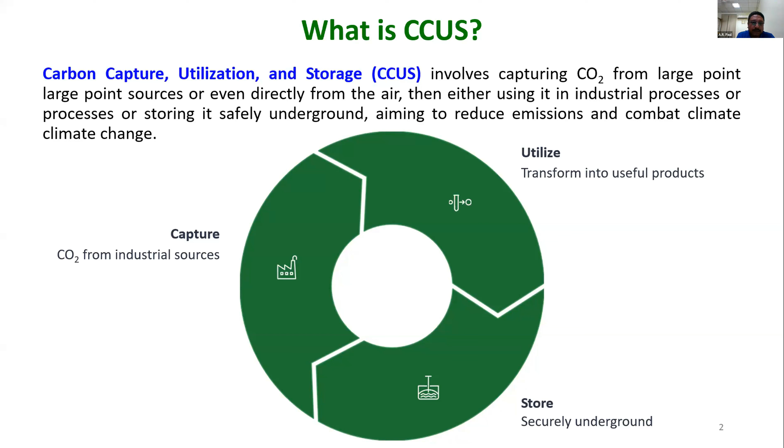In the second half of the lecture, I will focus more on the storage part, mostly the sequestration part. In the first part of my lecture, I will focus on capture and utilization, both.

If you see the key sectors playing a role in carbon dioxide emissions in India, this is a 2030 projection. Our power or electricity generation sector takes a lion's share, followed by industry. In this industry, there are a few hard to abate sectors like steel, cement, and fertilizer. These are called hard to abate because it's very difficult to remove carbon dioxide from their process. Suitable technologies are still under development for this sector. Next is transportation, which emits a lot of carbon dioxide locally, especially in the metros. Then residential - with rapid urbanization in many tier 3 and tier 4 cities and towns in India, even villages are not villages anymore. Almost all houses are built up in concrete, so huge concretization is there, and it also plays a role in emitting carbon dioxide. And agriculture. So these are the five major sectors playing a role in emitting carbon dioxide in India.

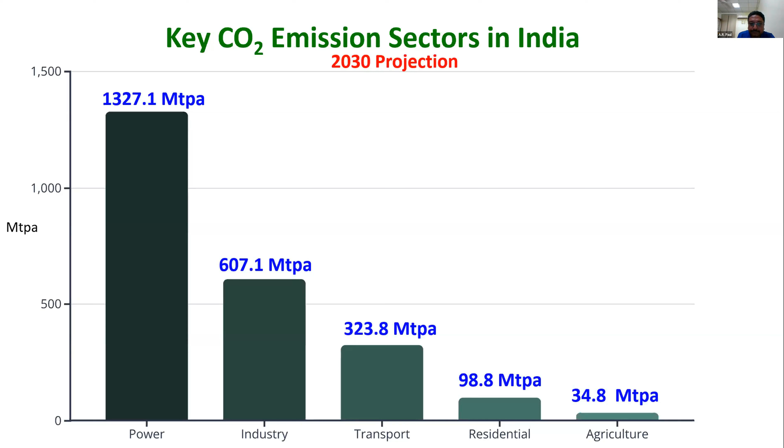Now I'm talking about carbon neutral versus carbon negative technology. I'll get a chance to discuss this later, but a few things are important. If a straight question is asked whether CCUS is carbon neutral or carbon negative or both, I must say it depends on the situation - case to case basis, depending on which technology you use for CCUS. For example, if you use a closed loop carbon technology where CO2 is captured, then utilized to make some product, and then carbon dioxide is recycled, then you may call it carbon neutral. And it can be carbon negative if you combine this CCUS with some negative emission technologies - right now, direct air capture or bioenergy with carbon capture and storage. So it depends on which technology you use, but direct air capture is still a nascent technology and the cost is prohibitively costly, so you cannot really induct it for the industry.

Now we'll explore some innovative solutions to reduce carbon dioxide emissions and foster a greener future. If you see the carbon dioxide emissions in India, a few sectors I mentioned are branded as hard to abate, like cement, steel production units, chemicals, shipping, and aviation. These sectors are really very difficult and challenging to decarbonize because of their heavy dependence on fossil fuel. Nowadays steel companies are trying with hydrogen - they are using hydrogen in the steel process to decarbonize it. Sweden is the first country to decarbonize steel production with hydrogen. Indian steel making companies are still doing research with help of funding, in-house funding, as well as funding from a few countries like Australia.

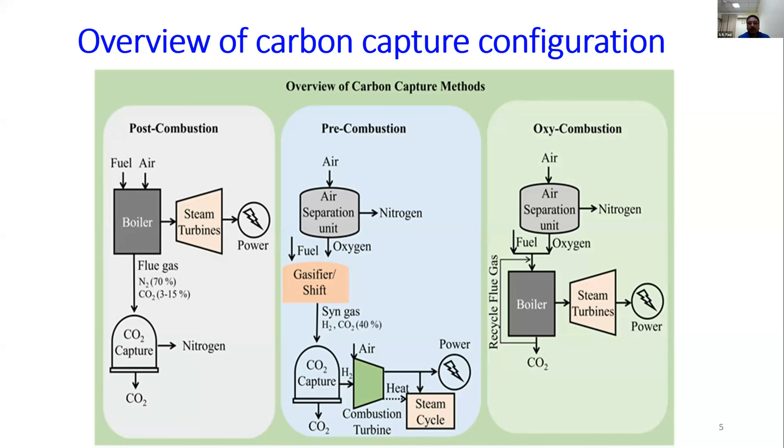So in oxy-fuel combustion, what happens? You burn fuel with pure oxygen to create a carbon dioxide rich gas, and that is easier to capture. So these are the three carbon capture methods.

Apart from that, there is another method known as carbon negative methods, direct air capture, where you can remove carbon dioxide from the ambient air, thereby addressing both ongoing and historical emissions. But there is a challenge - this direct air capture technology is still in its early stage. The cost estimate to extract per ton of carbon dioxide is around US $400 to $800, and its operational scalability is yet unestablished.

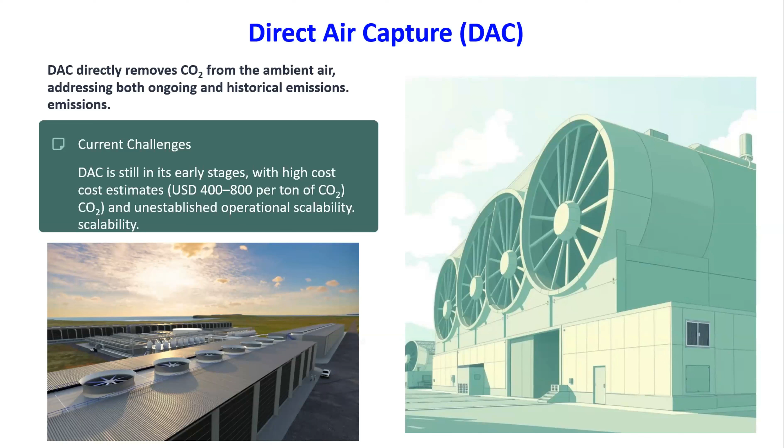DAC is useful if you capture from large point sources. For limited sources, DAC will not be cost effective at all. Now we'll see different CO2 separation technologies.

One is chemical and physical absorption. In chemical and physical absorption, different chemicals are used. Chemical absorption is used when you will get low carbon dioxide pressure. If your carbon dioxide pressure availability is high, you go for physical absorption. But the advantage with chemical absorption is that it handles CO2 effectively.

Therefore, there is no question of CO2 removal - the removal is effective. Another thing is physical absorption process is energy efficient. So there are both pros and cons with chemical absorption. Depending upon the scenario, you can choose.

Next is cryogenic capture technology. So in cryogenic, what happens? You cool and compress the gas to force it into a phase change, and in this way you can achieve very high carbon dioxide recovery.

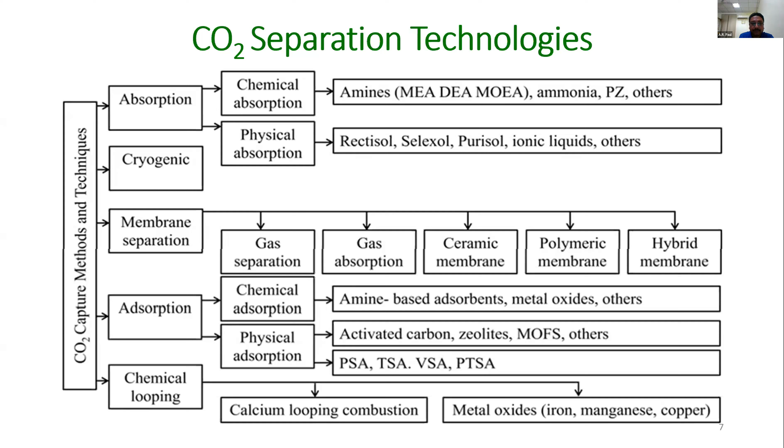Last but not least, is chemical calcium looping. It enables inherent CO2 separation using either metal oxides or calcium looping technology. It is cost effective, and calcium looping may increase plant efficiency. So these are several CO2 separation technologies. Depending upon its merit and situation, you can go for any one of them.

Now we'll come to utilization. Utilization is when you have avenues to utilize the captured CO2 and convert it into useful products, so it provides both emission reduction and resource generation. So utilization is very important.

You can capture CO2 and then transform it into synthetic fuels, chemicals, like medical grade calcium carbonate, or building materials like concrete-like structural materials, offering economic benefits as well as serving as avenues to reduce emissions.

We'll discuss some of the ways to use carbon dioxide and convert it into useful materials.

One is synthetic fuel. You can use carbon dioxide to convert into synthetic fuel, which can replace fossil fuel, reduce emissions, and promote a clean energy future. Next is construction materials.

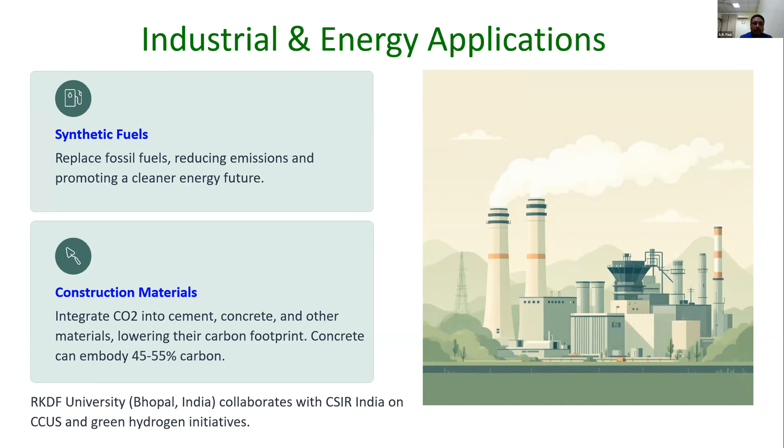There is a university, RKDF University in Bhopal, India. It has collaborated with CSIR India on CCUS and Green Hydrogen Initiative. So they are focusing on utilization. There are various academic organizations, and they have incubated startups working in utilization. I will defer discussing some of this to later slides.

Next is chemicals and materials. You can convert CO2 into methanol. Methanol is a key building block for making plastics and other products.

Next, you can create polymers, composites, and other value-added goods from captured CO2.

Another thing is mineralization, where if you cannot do anything with CO2 on the surface, you can think of storing the CO2 in the subsurface for some years under heavy temperature and pressure, where the sequestered CO2 will subsequently crystallize into stable carbonate mineral forms. So it is a permanent solution, and you can use that crystallized form of minerals for commercial use.

Next is agriculture and food.

You have seen the greenhouse effect, especially in regions where sunlight is not abundant or temperature is not above 20 degrees throughout the year. They grow plants and foods in greenhouses.

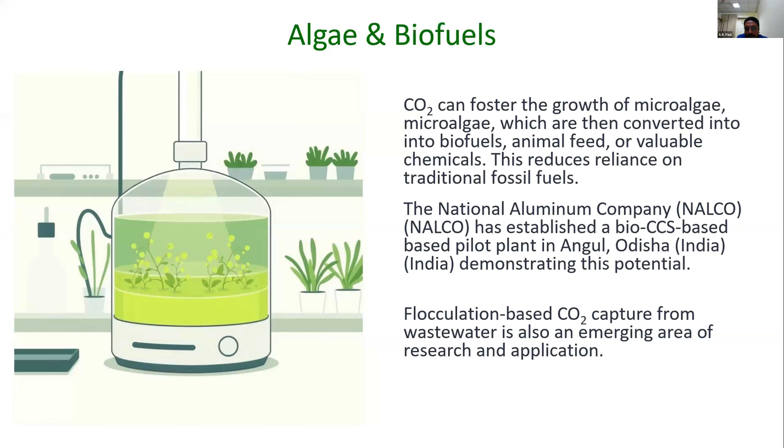Another area is wastewater treatment. Flocculation is a step to clean solid particles in the wastewater. So if you go for flocculation-based CO2 capture, this is also an emerging area.

Next is sequestration. If you cannot do anything commercially useful with CO2, what will you do? You cannot store it on the surface, because storage in a cylinder for a long period of time is a costly affair, as well as being like a time bomb. So you cannot store it on the surface. Instead, subsurface storage - storage of captured carbon deep into the earth - is one of the objectives.

So where can you store it? Wherever an oil field or gas field is opened for commercial exploitation, it has a certain life, and after that, commercial exploitation is no longer viable. So companies usually leave that oil or gas rig, known as a spent oil or gas rig, still containing some percentage of gas or oil. If you inject carbon dioxide around this oil rig beneath the surface, it creates pressure on the leftover gas and liquid, making it economically viable to extract the remaining gas or oil from that spent rig.

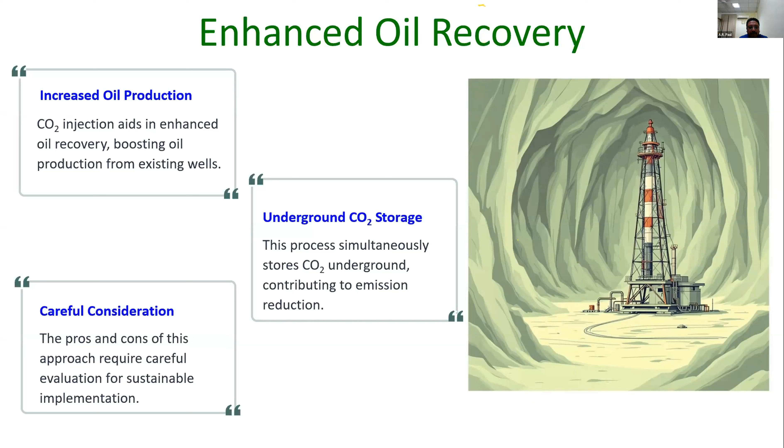But when you store carbon dioxide in the subsurface, it has both advantages and limitations. These require careful evaluation for sustainable implementation. Otherwise, carbon dioxide leakage will start and locally pollute the environment.

Now let me share with you some Indian success stories. TACFL, a company located in Tuticorin, partnered with Carbon Clean, a UK-based company, and runs the world's first industrial scale CCU plant near Chennai. It is installed on a coal-fed boiler. The plant is designed to capture 60,000 tons of CO2 per year and convert it into soda ash. The project is fully financed privately, and the cost is estimated to be just $30 per ton of CO2, which is much lower than the $60 to $90 per ton typically observed in the global power sector.

Another success story is a startup incubated at IIT Bombay known as Urjanovac. It enables facile conversion of CO2 into commercially high value products like pharmaceutical grade calcium carbonate.

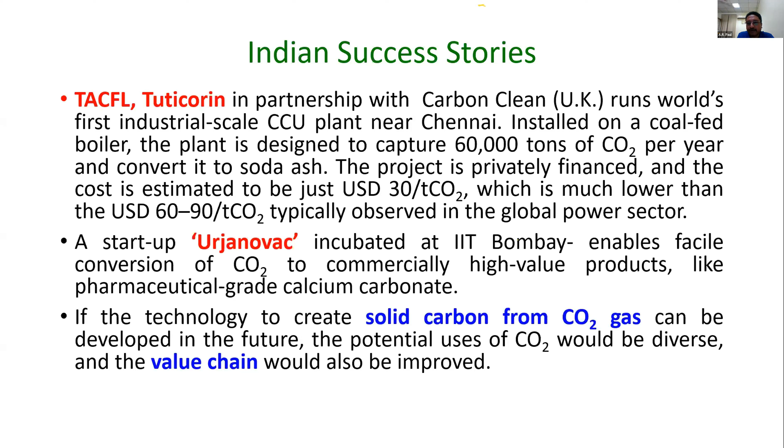If the technology can be developed to generate solid carbon from carbon dioxide gas in the near future, then the use of carbon dioxide would be diverse and the value chain would be improved a lot. So chemists are already working on it.

Now come to different carbon sequestration methods, where we'll explore the scalable technologies. The scalable technology is very important. You can develop a technology in your lab for 1 gram or 1 milliliter of solid, liquid or gas, but whether your technology is capable of scaling so that you can use it for industrial scale - if it is not, then your technology will be confined to the lab or within patents.

So there is a company known as Equinor. It is a Norwegian company. It runs Northern Lights, which is the most successful CCS project - carbon capture and sequestration project - to date. So yes, there are a few success stories.

India is gradually catching up, but the Scandinavian countries, the countries in the northern hemisphere, towards the pole, like Norway, are expected to face the consequences of global warming fast, followed by other countries. So they are desperate to use technology like CCUS, because CCUS has the ability to make this world carbon neutral, and in some cases carbon negative.

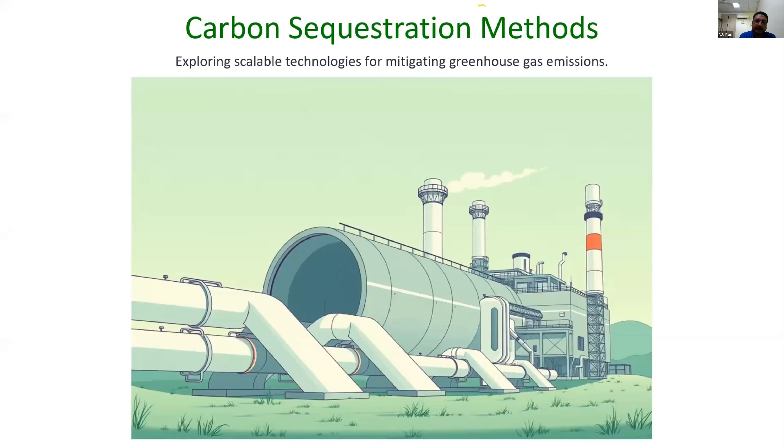I can share your data - like CO2 capture and storage data. If you see the potential of CCUS, a study shows that around 19-20% of the required reduction of greenhouse gas emissions by 2050 will be done by different carbon sequestration methods. So you cannot really neglect carbon sequestration just by saying this is not economically viable now, that it is quite costly.

Now see, in deep unminable coal beds - there are coal beds which are used for coal mining, and after that they are left with no use. So you identify this kind of coal bed, and if you inject captured carbon dioxide into the coal seams, it will displace the methane trapped inside, and therefore you can recover methane which can be used as fuel. So this technology gives you two solutions simultaneously: your CO2 is getting stored and you are recovering methane, thereby getting some additional energy in this process. This is known as enhanced coal bed methane, ECBM.

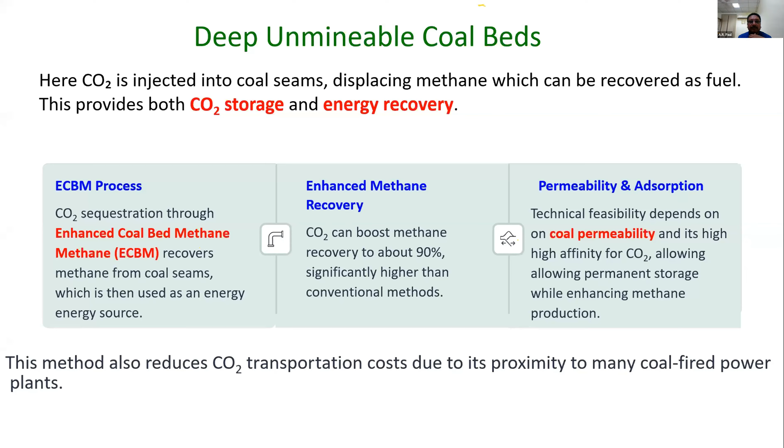A study shows that 30 to 60% more crude oil can be extracted using CO2 based enhanced oil recovery, because in the spent oil rig, when you inject CO2, it mixes with the oil and reduces the viscosity of that mixture, and therefore you can transport the oil, which becomes cost effective.

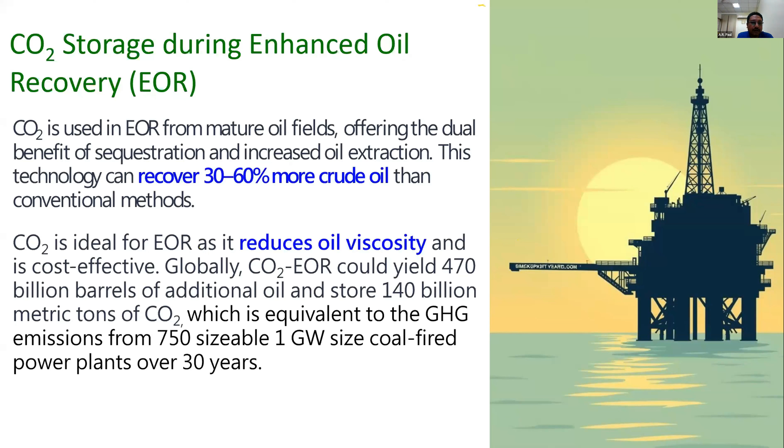Data shows that globally, if you use CO2 based enhanced oil recovery, it can yield 470 billion barrels of additional oil and store 140 billion metric tons of CO2, which is equivalent to the greenhouse gas emissions of 750 numbers of 1 gigawatt size coal-fired power plants over 30 years. So you see the huge consequence of employing CO2 based enhanced oil recovery.

Another technique is to store CO2 in the ocean, like at 1000 meter depth. At that depth, you can store carbon dioxide because ocean water is unsaturated and it can easily dissolve, and ultimately it will form a hydrate.

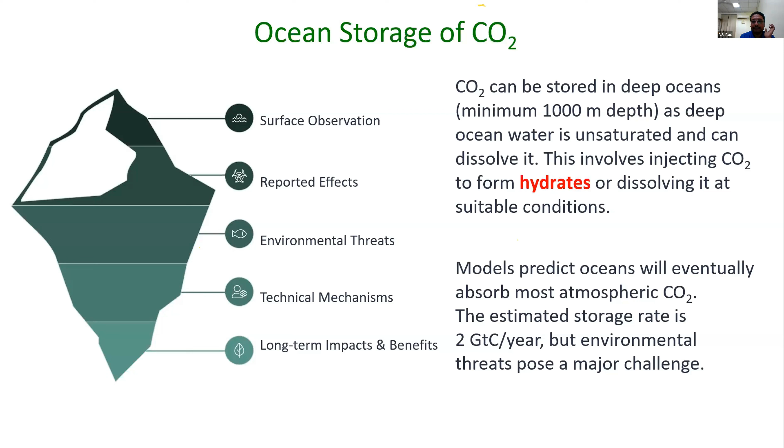There are different computational models which predict that oceans will eventually absorb most of the atmospheric CO2. The estimated storage rate is 2 gigatonnes of carbon per year, but there is an environmental threat: we cannot dissolve it, and it starts emitting again. What will happen, or will it affect marine life? So there is a lot of debate on it.

Another technique is to store CO2 in a saline aquifer, because if the aquifer contains brine or brackish water, we don't use it for drinking purposes. Saline waters in sedimentary rock or limestone formations are plentiful in sub-oceanic surfaces around India, especially near the KG basin and the Gujarat basin. There, if you inject compressed CO2, it will displace brine and occupy the pore spaces of these sand and limestone formations.

There are certain factors we'll see through case studies, like the structural quality of the sand and limestone, its thickness, porosity and permeability. These determine the CO2 injection capacity. It's not that at any pressure you desire, you can inject it into the saline aquifer. My student has computationally simulated different scenarios and found the pressure and flow rate at which CO2 can be injected in the Krishna Godavari basin, in coastal Andhra Pradesh, so that there won't be any leakage and CO2 can be trapped inside this deep saline aquifer.

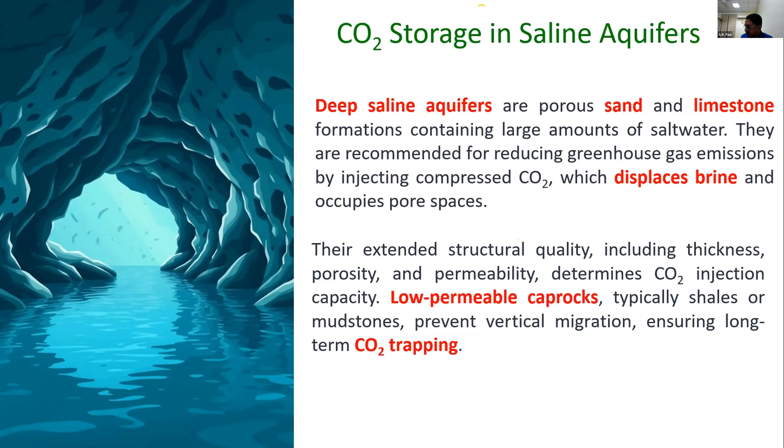Now there are four key trapping mechanisms. One is CO2 contained beneath a non-permeable cap rock. Sand and limestone are permeable. If there's a non-permeable cap rock on top with sand and limestone beneath, and you inject CO2 bypassing that cap rock, it gets injected deep under pressure. Because of buoyancy, CO2 will gradually come up over the years, but since there's a cap rock, it cannot reach the surface again, even after 20-30 years. This is known as structural trapping.

Another is residual trapping, where CO2 gets trapped as disconnected droplets within the rock pores by capillary forces, which prevents migration of the CO2. I'll show you some diagrams later of how CO2 migrates over the period of time, like over 10, 20, 30 years.

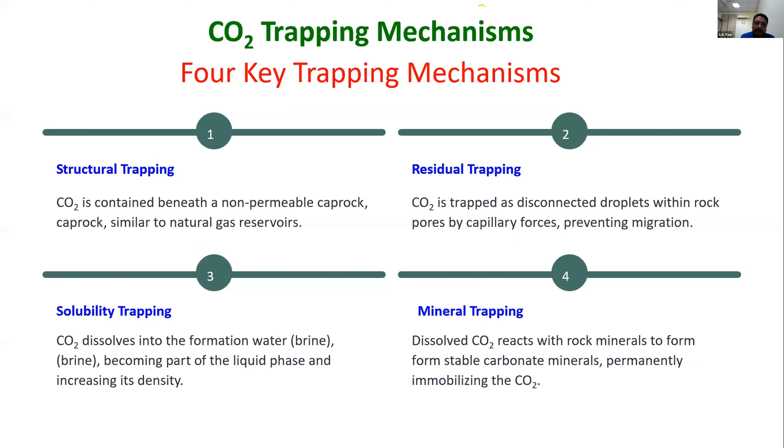And another is mineral trapping. Dissolved CO2 reacts with rock minerals under very high pressure, high temperature conditions, because deep below the saline aquifer there is high pressure and high temperature, so a chemical reaction happens and it eventually forms stable carbonate minerals. So your CO2 becomes permanently immobilized, and there is no chance of the CO2 leaking to the surface.

But there are some key challenges to storing CO2. One is high capital cost. If you look at total carbon capture and sequestration expenses, carbon capture accounts for 75% of the total. If you deploy it in any power generating unit, it will increase electricity prices by 30 to 90%. That is the problem — unless the government promotes this technology with subsidies, you cannot really employ it.

Next is reduced energy efficiency. CCS itself requires energy for carbon capture and sequestration. Where will you get that energy from? From the power plant itself where you are going to deploy CCS. So it will reduce the overall energy efficiency from 48% to 36%.

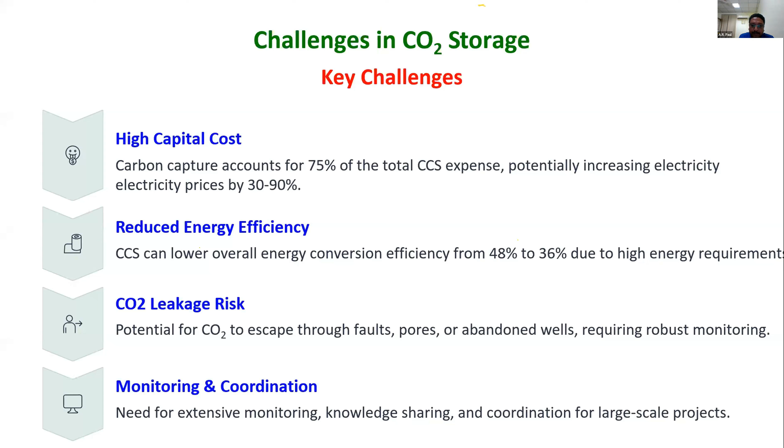Another challenge, which I discussed already, is the potential leakage risk of CO2 through faults, pores, or abandoned wells, which requires continuous monitoring. So these are some of the challenges.

Now I'll tell you about the current CCS initiatives in India.

Pilot plants in thermal power plants and fertilizer industries are capturing and utilizing CO2. Vindhyachal Super Thermal Power Station captures 20 tons of CO2 daily from flue gas emanating from their power plant to produce 10 tons of methanol. This is a perfect example of CO2 capture and utilization.

IFFCO, the Indian Farmers Fertiliser Cooperative, has urea plants in Aonla and Phulpur in Uttar Pradesh. Phulpur is very near to Prayagraj, where I am located now. They are utilizing amine-based post-combustion capture technology with a capacity of 450 tons of CO2 absorption per day. And in Jagdishpur, Uttar Pradesh, Indo Gulf Fertilizer Limited has similar capture technology with a capacity of 150 tons per day. So there are a few success stories.

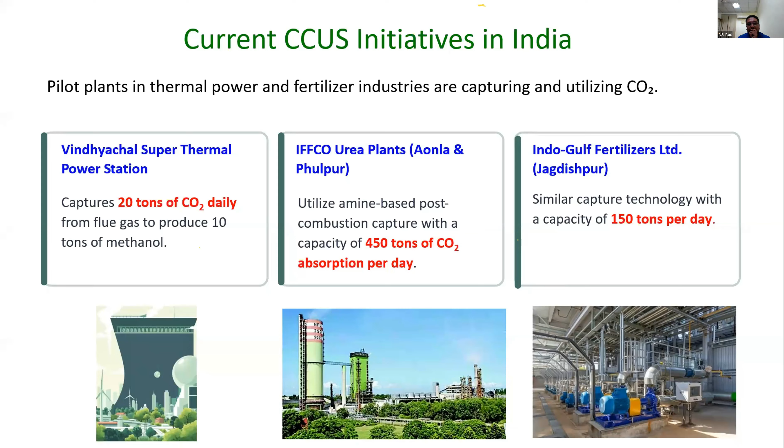Now let's look into the research and innovation hubs of CCUS in India. The Department of Science and Technology, Government of India, has established two National Centers of Excellence for carbon capture and utilization. One is located at IIT Bombay, another at Jawaharlal Nehru Center for Advanced Scientific Research in Bangalore. These serve as hubs for research, innovation, and collaboration among researchers, industries, and stakeholders, and they also incubate startups.

Apart from that, NTPC NETRA has a facility in Greater Noida. NTPC NETRA and IIT Bombay are studying geological carbon sequestration potential in India.

There is a shortage of time, so let me skip the policy and regulatory framework details, and focus on policy avenues: carbon credit and carbon tax. The Indian government has two distinct policy avenues for CCUS, each with unique benefits and challenges. One is carbon credit and incentives.

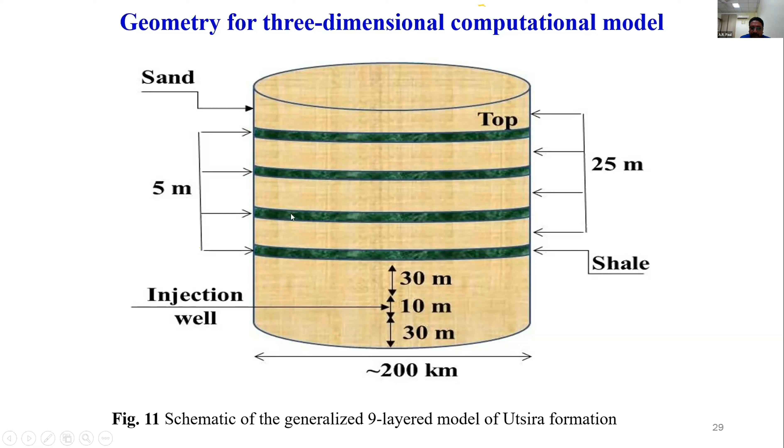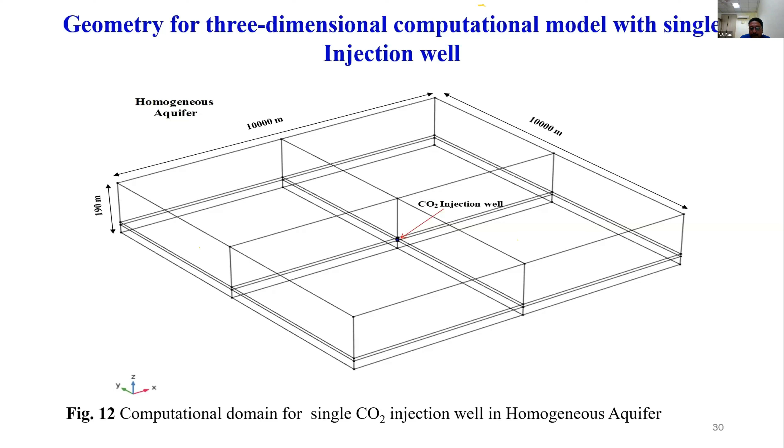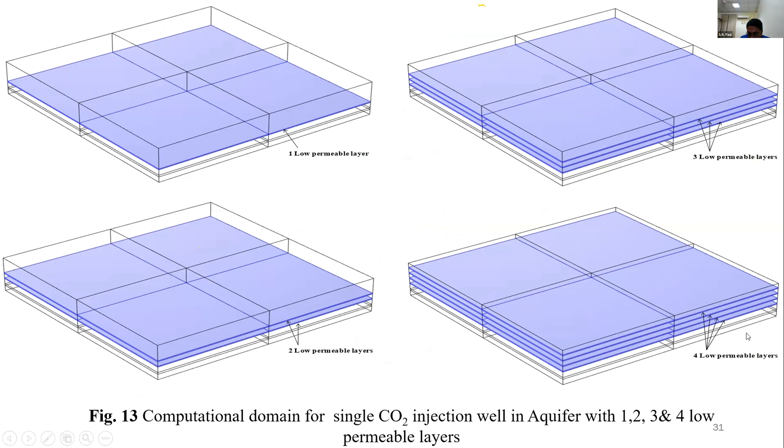Here there is no impermeable layer, you just see the blue sheet. Blue sheet signifies one low permeable layer. Here we use two low permeable layers separated by 5 meter distance, then three permeable layers, and four permeable layers separated by 5 meter distance with respect to each other.

Then you go for grid generation. It is a standard CFD procedure applied, so I am not going to extend it because this is not the CFD class. Those who are interested can see, because we have published a couple of papers on this and these results are reported.

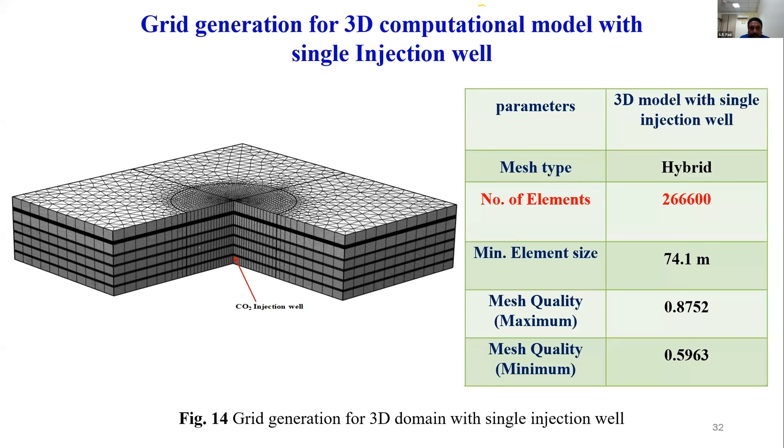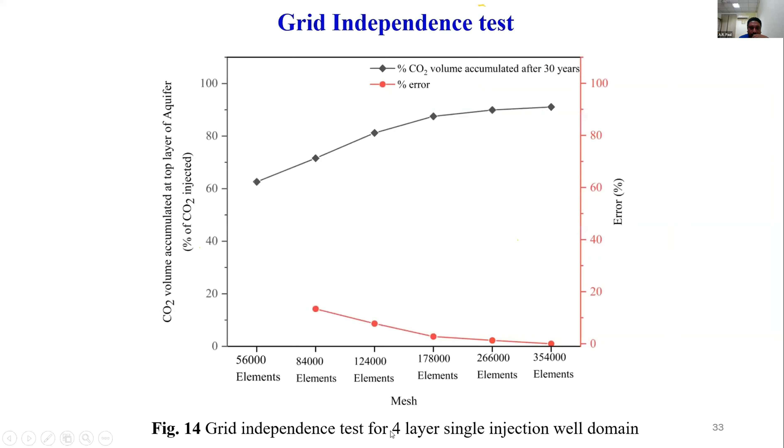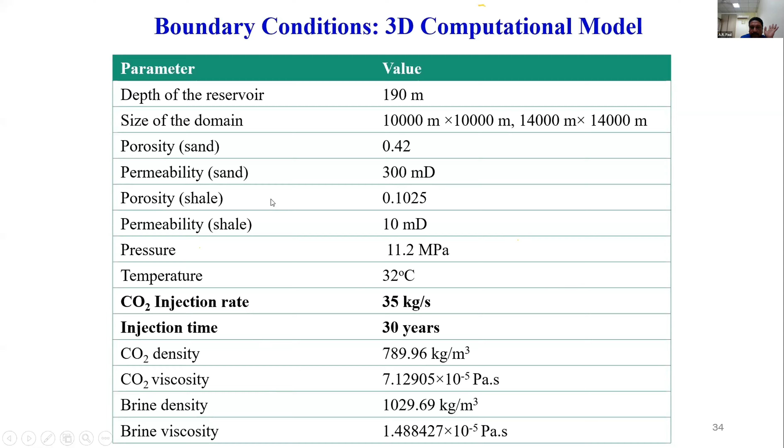So the grid independence test, we have used the grid independency test. In boundary conditions, you see what we have used. We used CO2 injection rate as 35 kg of CO2 per second and our injection time is 30 years. For 30 years continuously we kept on injecting the carbon dioxide. So these were the boundary conditions given to the software. It is based on saline aquifer. It contains brine density, viscosity, CO2 density, viscosity, pressure, permeability, porosity of sand, shale, everything is given. So these are other boundary conditions.

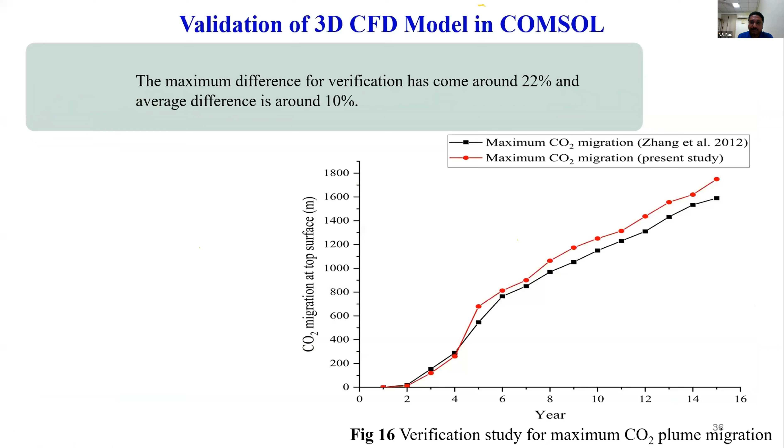Now we have validated it. Our validation shows that maximum difference with the result reported in literature is 22% and average difference is around 10%. For such a physical case where it is very difficult to simulate the case physically, this variation is acceptable.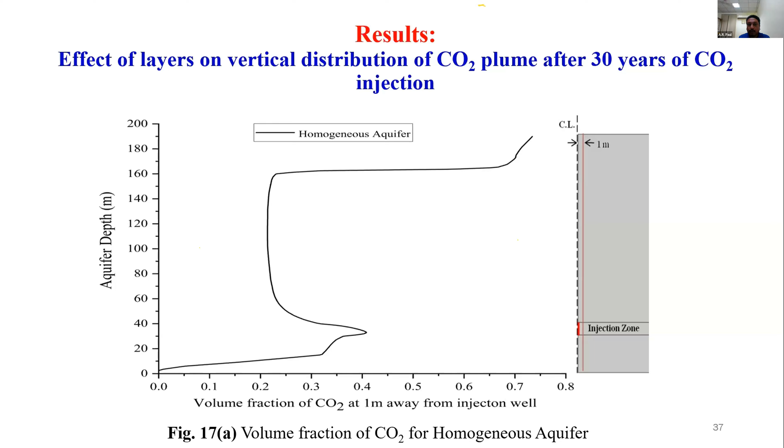We can see that as the CO2 is injected from here, it goes directly from the top of the surface without any interference because there is no low impermeable cell in it, so smoothly it goes to the top. But what happens if you put a low impermeable cell here? It will delay your injection, because the CO2 will not easily percolate through this low impermeable cell structure.

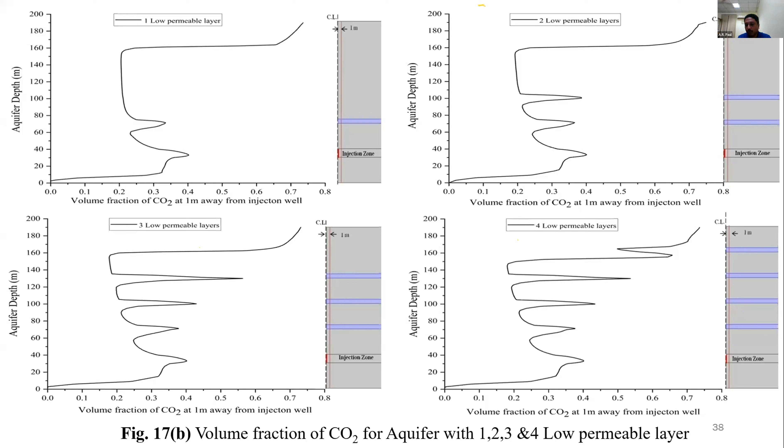Now, if you add one more impermeable cell, again it will be tough for CO2 to come up. So for us, if we were asked to prevent the leakage of CO2 from the subsurface, it is a better scenario to try to find geological locations where a lot of such low permeable rocks are there between the sand or limestone structure. So it will delay the migration of CO2 plume to the top surface.

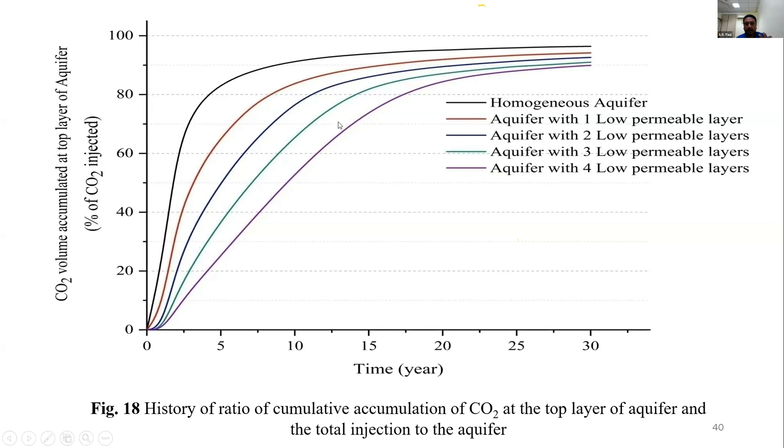Next one is surface pressures. Because you see, if you inject something deep into the surface at a very high pressure scenario, then because of buoyancy, things will come up.

It will build up a pressure on the cap rock. And if cap rock cannot withstand that much pressure, so cap rock will...

Create a leakage, and through this leakage or fissures, the CO2 will again start coming up and will mix in the atmosphere. So your top surface pressure measurement or pressure computation is required.

Radial distance, like if you see the chord, if you see the diagonal, so it may be around 12 kilometer. So 12 kilometers, 6 kilometer on left hand side, 6 kilometer right hand side.

So at the center you will get maximum pressure. And after 40 years, you see your pressure will be lowest. And after 30 years, your center pressure will be higher.

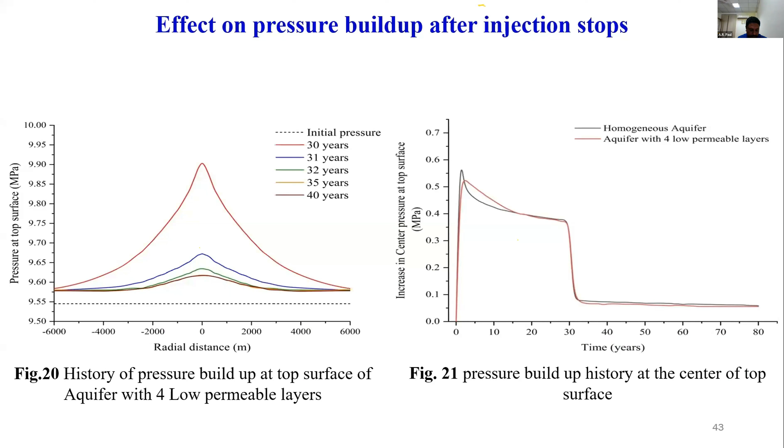Next one, 44. Yes, this is a very interesting one. What happens? We kept on injecting the CO2 for the first 30 years, and after that we stopped injecting.

What will happen then? So under this scenario, we observed it computationally up to 80 years, whereas after stopping the injection, we monitored it for another 50 years.

And we have seen that as the injection stops, the majority of the injected CO2 eventually accumulates at the top layer of the aquifer.

So it is better if you can stop injection after certain years.

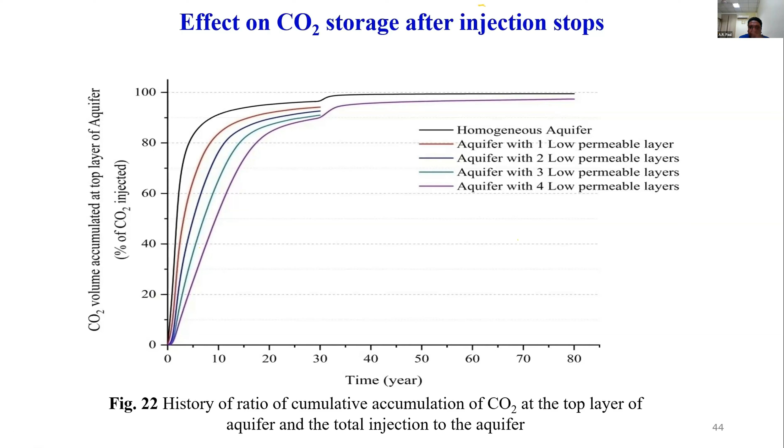Okay, now we'll see the second scenario. We have still some time.

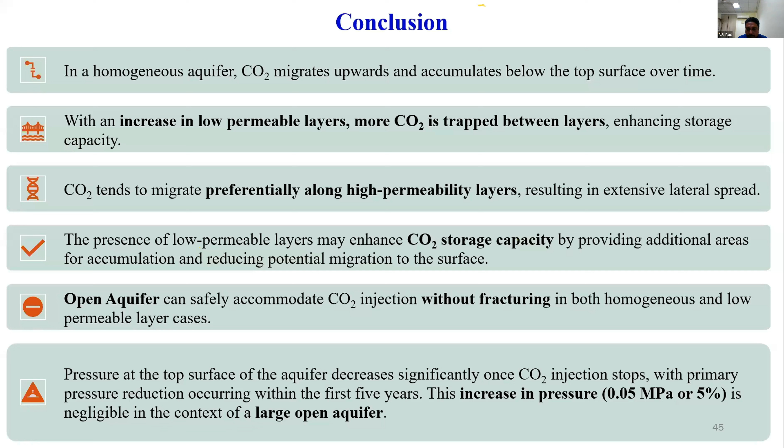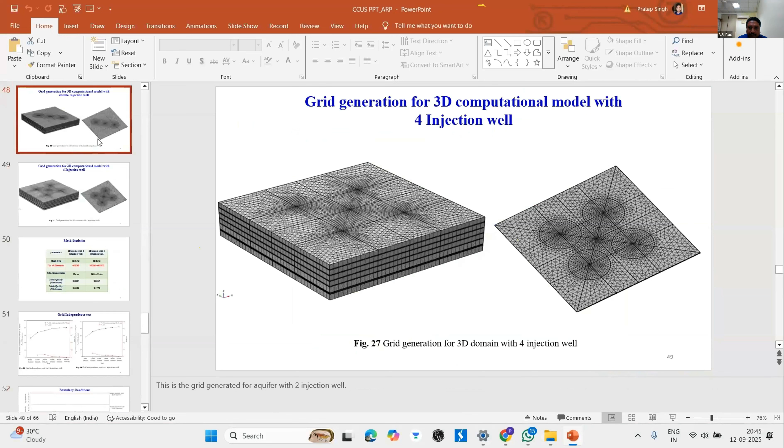It's stuck. Pushpinder? Yeah, it's okay. There is a lag. Let me... Yeah.

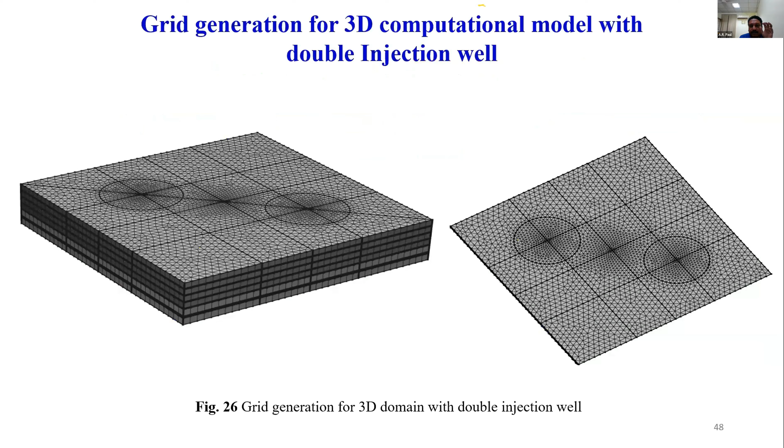Within the permissible level. So what injection strategy we can go for? So you see how inter-injection well distance are changed. Yeah.

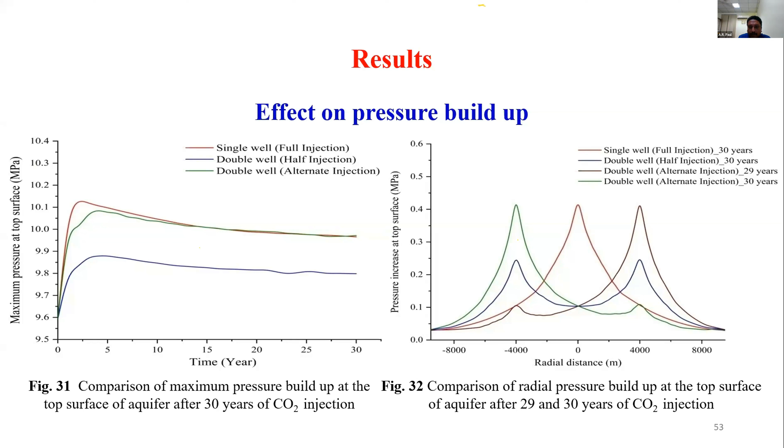Next is this slide. This is very interesting one.

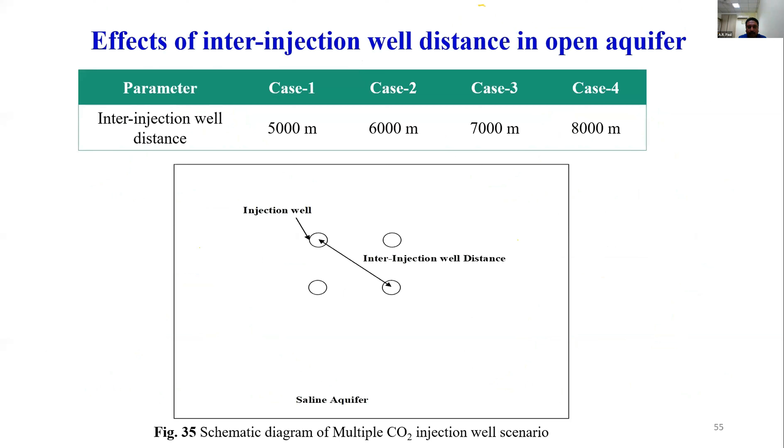You see, there are 4 wells here, 4 wells, and we have changed the inter-injection well distance. There is some problem. Yeah.

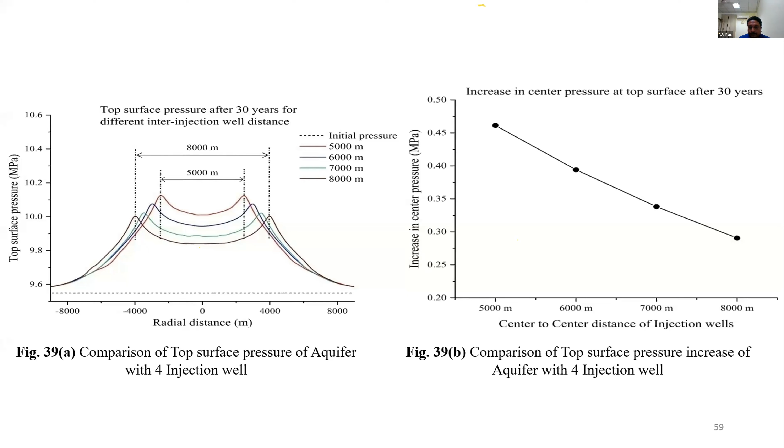With this, I want to conclude. So the maximum what we have seen from these two case studies. We had to hurry up because there was less time left, so I could not really elaborate the computational methodology part. I just explained the problem and immediately showed some of the results.

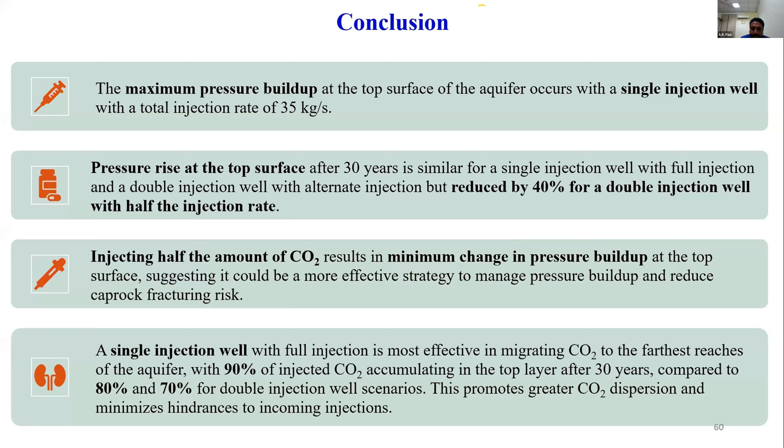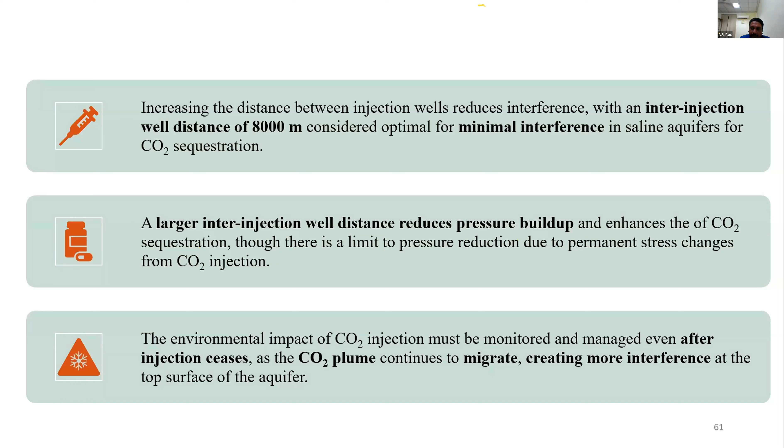But what you need to study is the environmental impact. Nowadays any big, large industrial project cannot get clearance without the environmental impact assessment. So environmental impact assessment of CO2 injection must be studied. Even if it is implemented, environmental impact of CCS project must be monitored and managed even after stopping the injection, because CO2 is a gas and gas rises, and this is now a gas under high pressure, high temperature. So CO2 plume continues to migrate inside the earth's surface. You cannot see it, but it happens, creating more interference at the top surface of the aquifer, and whenever it gets a passage, it will come up and mix with the atmosphere.